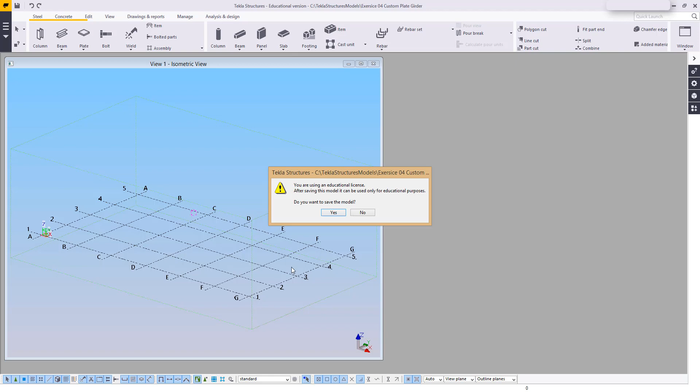If we head up to beams, we'll see there are already a couple of different options when doing something like a plate girder. For example, you can take a WI or a PHI. With WI, you put in your own amounts, sizes, and get it exactly the way you want it. You can also have it go large and smaller, have different sizes for front and back, and you can mostly do the same with the second one.

But we are not going to do any of this today. What we'll be doing is making our own.

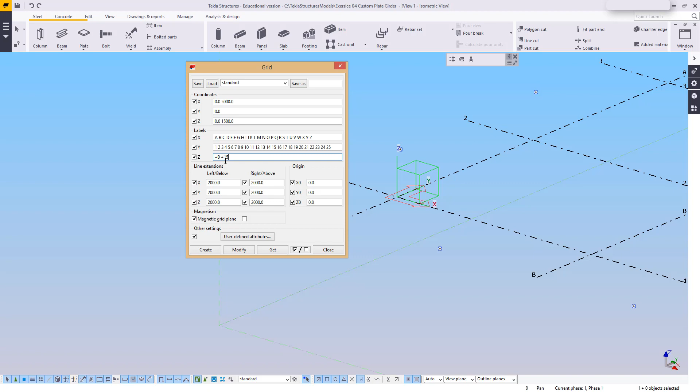Firstly, I'm going to open up my grid lines and set it down to be, let's see, make this 5 meters in length. Width, we don't need anything, and height we're simply going to have a bottom and a top, since we'll only be doing this one item. 1500 should do. Modify this and close.

Once that's done, I'm going to reduce my work area by fitting it. Here we go. Next thing, not really needed, but I'm going to change one to CL, since this is a center line. Then I'm going to right click, create long grid lines to get views on all my grids.

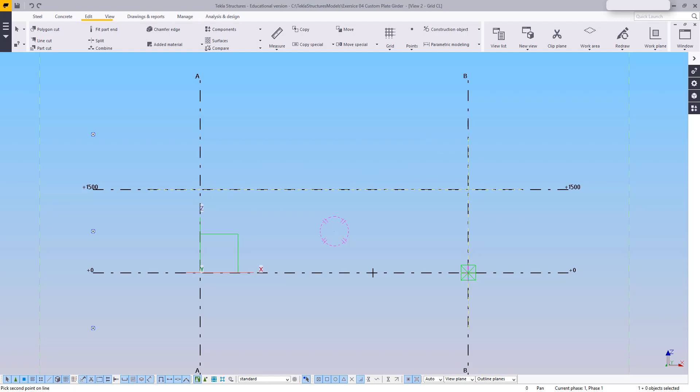Let's open up center line and work from here. Starting off, I would like to lay out everything using construction lines. I'll put one at the top, going down, bottom, and back up. This is just so I can lay out the rough positions of all the objects or items I'd like to put in. Firstly, I would like this beam to have multiple sizes.

It's going to start off at 1500 and end off at 1100. But I don't want a gradual change. I want most of it to be 1100 and only a small area 1500.

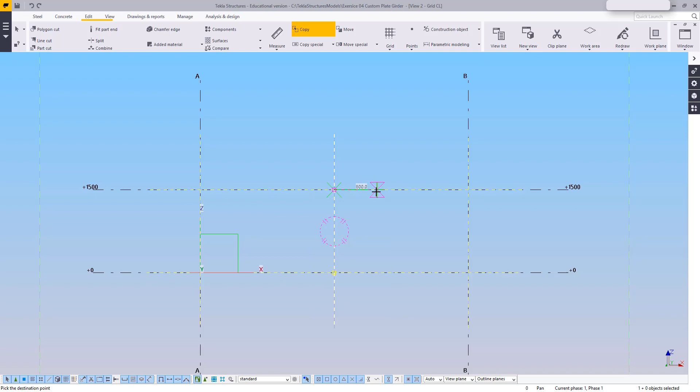So this might not make great sense, but I'm going to copy this 1500 to the side and copy it another 1000, and that's going to be my change point.

From here, I'm going to copy this bottom up by 400 and draw another construction line between these two points. That's going to give us the rough outline of what we'd like for our plate girder.

Now for the parts, I'm not going to use any of this. Firstly, I'm going to change this to plate. I can change the assembly mark to PG for plate girder and change the name to plate girder. Now for the section size, we are going to use a plate that is 40 thick and 600 wide.

I'm going to change the color to 1, and for now I'm not going to change anything else. Apply and put it in.

As we can see here, it's currently facing down, so we'll head on over to position and start changing our rotation. It's below my line, it's in the center, and it's facing down.

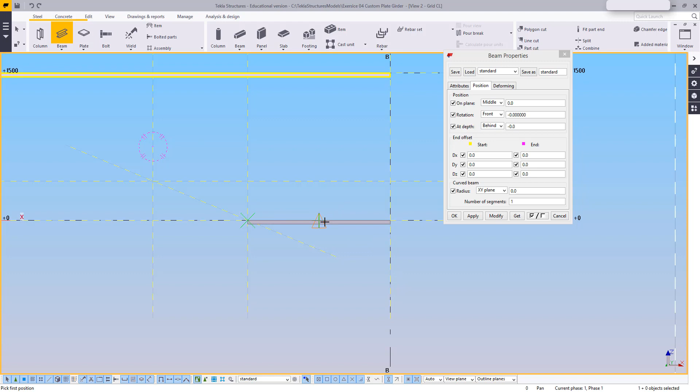So that is good. When it comes to these at the bottom, I don't want the part to be below, I would like it to be above, so I'm going to change it to front. Apply, get rid of the part, and just put it back in again, and we'll see it's nice on the front. From there we can put it in the rest of the way.

And this is going to be our flanges. Now I'll of course need to cut away these clashing areas, but we can do that at a later stage. For now I want to put in the web.

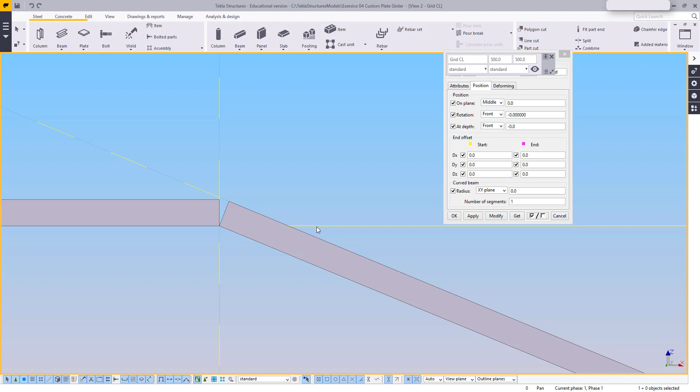So I'll take these two lines and either copy or move them up, so I can get a connection point between those two, or an intersection point more precisely. The reason for this is my web.

The web is just going to be a normal contour plate heading from corner to corner, to the beginning, and I can either click at the beginning or middle mouse button and it will finish off.

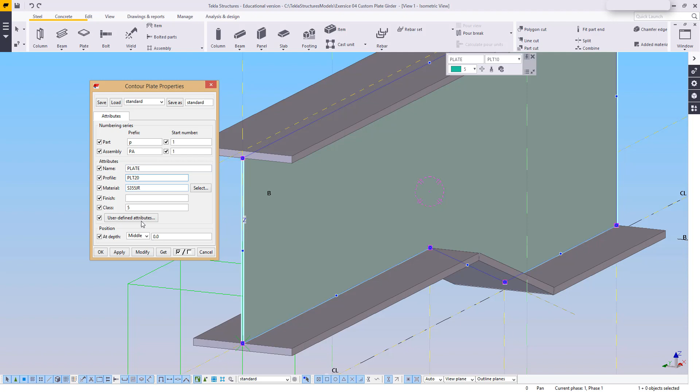As you can see, it's fairly thin, so we'll need to change this to something a little bit thicker, and we're going to use a 20 thick plate for our web. Color wise, I'd like it to be the same as the rest, so I'm going to change it to be the same as the rest.

Now for the next part, I would like to sort out this clash over there, as well as add some rat holes. For these rat holes, you can double click on any of our nodes, and we are going to select this one over here using 50, modify, and you'll see we got a nice cut out there for welding, and of course drainage for galvanizing.

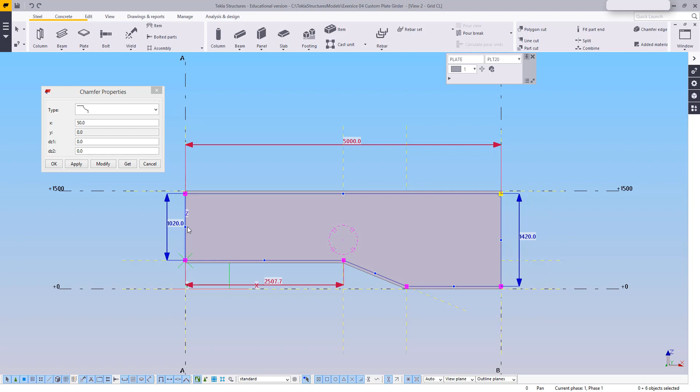Next I'm going to hold Alt and do an area selection around the entire item. This is going to select all my points, and I'm going to modify my chamfer properties so that all of them change into these rat holes. Close that up.

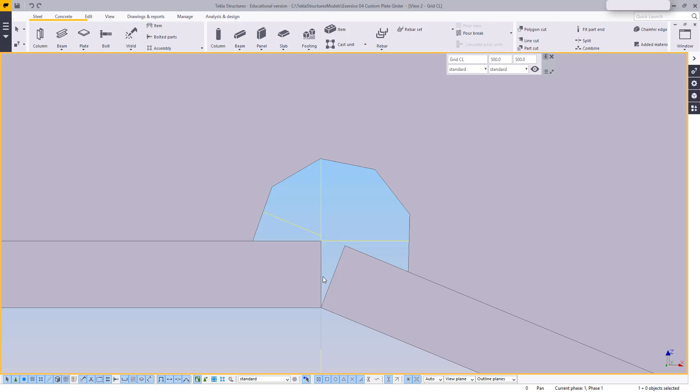Next, I would like to cut away the unnecessary material, and because this is a fairly thick plate girder, I would like to have quite a good amount of welding, and to that end I am going to cut away some of the plate to make space for the welding.

To do this, I'll put in a 20 circle so that when I use a line cut, I can use the 2 points of this circle to cut away that corner. I can either put in a new circle or just move this one over to another line cut from the 2 points and get rid of that side as well.

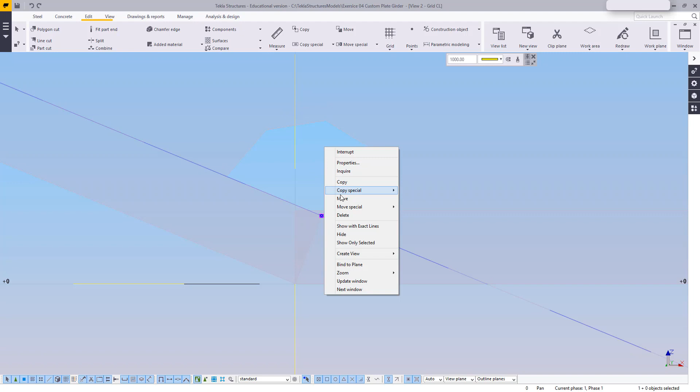Now for the one over here, I will need to do something a little bit different. So what I'm going to do now is Control 2 to get a nice transparent view. I'm going to move this line to the middle over there. This bottom line over here, I'm also going to move to the center of that item.

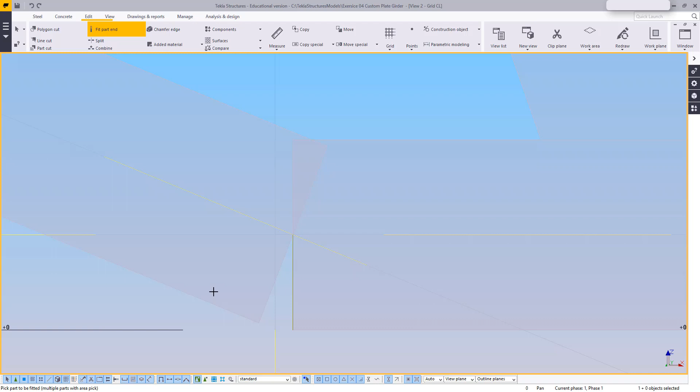And the reason for that is simply so that I can shorten the beam, but you don't necessarily have to shorten it. You could always use a fit part end and just cut it at that length. Basically, I don't want these two crossing each other. I want them to intersect in the middle. Now from here, I'll again be doing 2 circles, one for each side. Cut out the corners so that we could fill that up with welding.

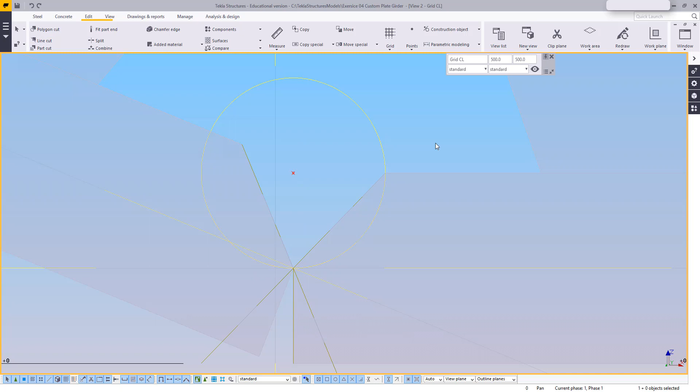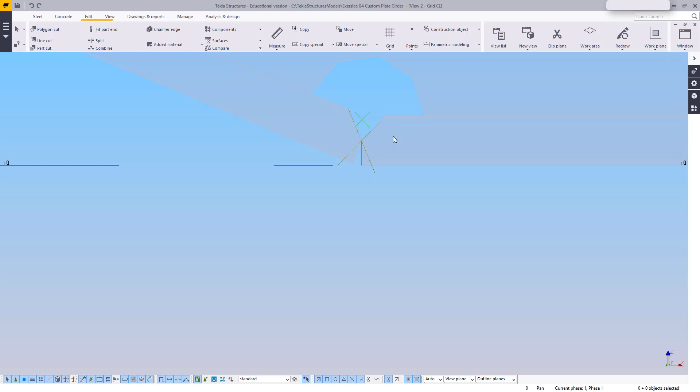Wonderful. Now sometimes it will happen that Tekla doesn't snap. Either just redo the snap or try and change it up and it might work. Otherwise, try a different method. Try copying a line 20 back or something along those lines.

After this is done, I'm now going to add a set of stiffener plates. I think, yes, stiffener plates should be next. So for these stiffener plates, we've got one of two options. We can either do it manually, or we could try and deceive the program a little bit. Now, I'm going to do one manually and another in a different method, just to show you both methods. Neither of them are incorrect, they're simply just preference.

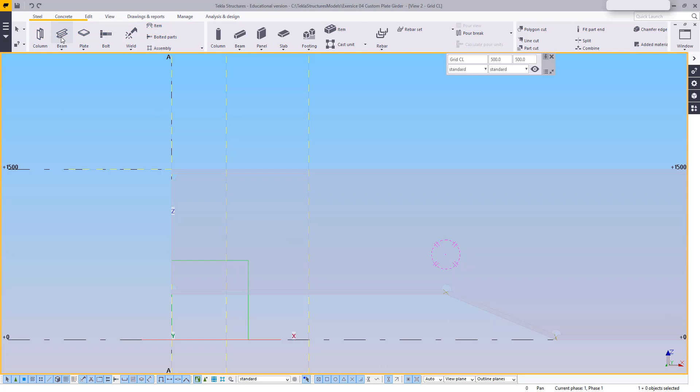So for the first method, I'm going to go to my selection, go to beam, and get my WI. So the height I would like as, let's say, we'll do the small side, so it's 1020. The web thickness is 20, the flange thickness is 40, and the width is 600.

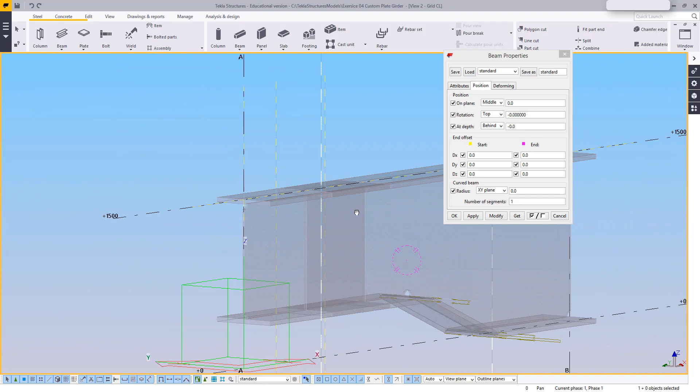Okay, and we would like our position behind, apply, and I'm just going to put it from anywhere over here to anywhere over there. Let's change this to top, and there we've got it. And as you can see, both on the side and from the front, it overlays my current beam perfectly. So that's good, that's what I want.

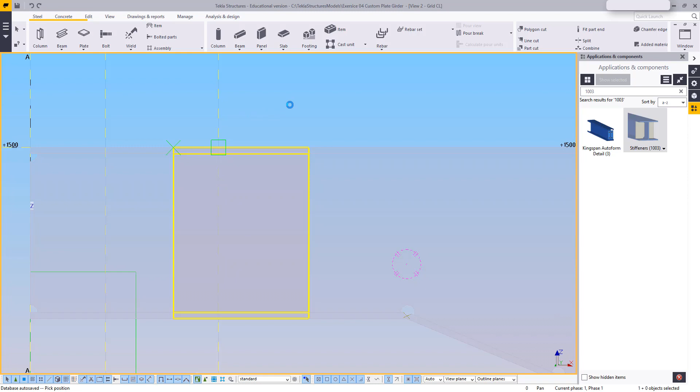Now for stiffeners on this one, I'm going to use the existing stiffener component, which is 1003. Over here, stiffener, I'm going to select my beam, I'm going to select my point, and it will put in this stiffener component according to that. Let's go to isometric and have a quick look at it.

Now what's nice about this is it's fairly easy to set it up exactly the way you want it. So we can say you want both of them to be 20 thick and 250 wide. And of course we can go to our parameters, say that we would like an arc and change that to 50, so we've got the exact same arc we've been using on the other side.

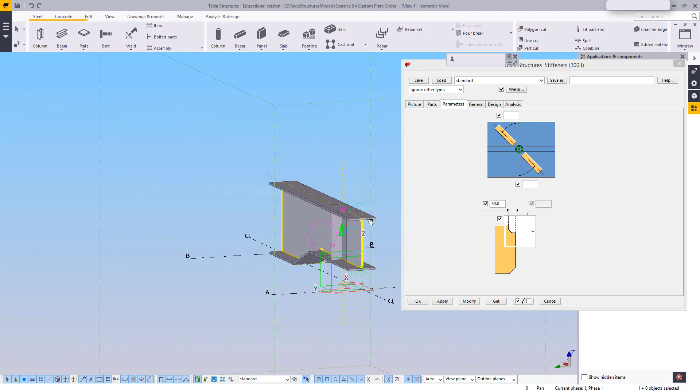Once this is done and you're happy with the stiffener, simply select the component, right click, and explode it. Now it's no longer a component but simply parts. After this we will select the new piece we put in and delete it, and it will leave our new stiffener behind.

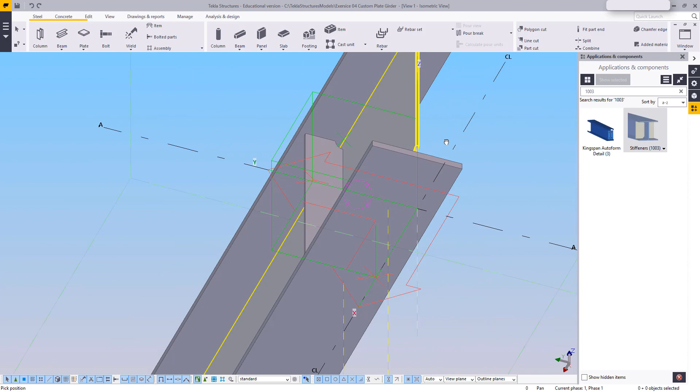The other method of doing this is the traditional method of creating a view, getting a section view, and then from that section view, let's just make this I think about 100 should do. I don't want to see the other one.

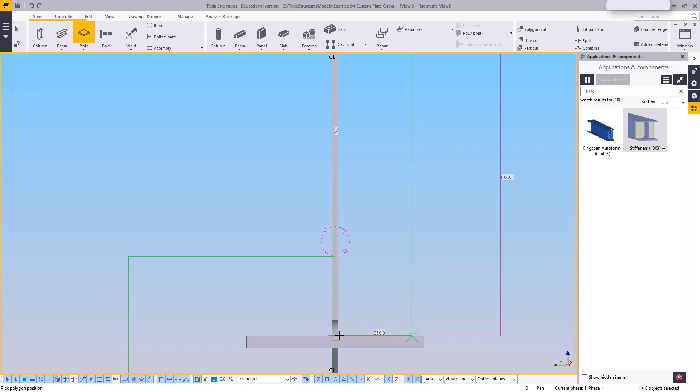Let's get this over to the other side by copy rotating. So copy special rotate, stick that over there and copy it over. Now the particular one you use does not matter at all. Do what is most comfortable for you. Sometimes you will have to do this manually by necessity. Other times you can simply get a component that'll get you somewhat there, and you can get the rest on your own.

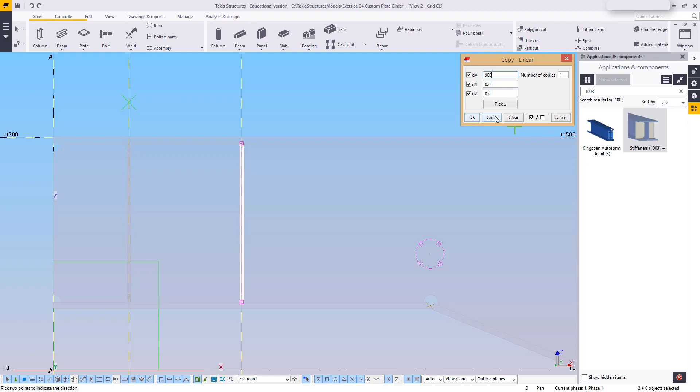After this, we are going to copy it linear in the X direction by another 900. Copy. Take this one, and we're going to copy it back by 1550. And just to ensure that I did not mess up my numbers at any point, I'm going to do the last 1300. Yes, it ends directly at the back, and I can now undo that. I don't need anything at the back. I simply did that to ensure that the numbers I was using for these have been correct.

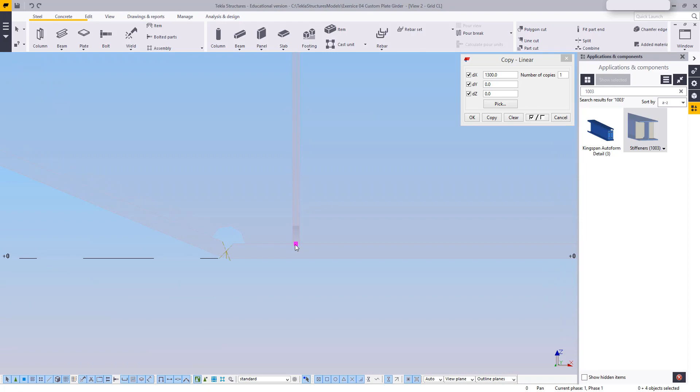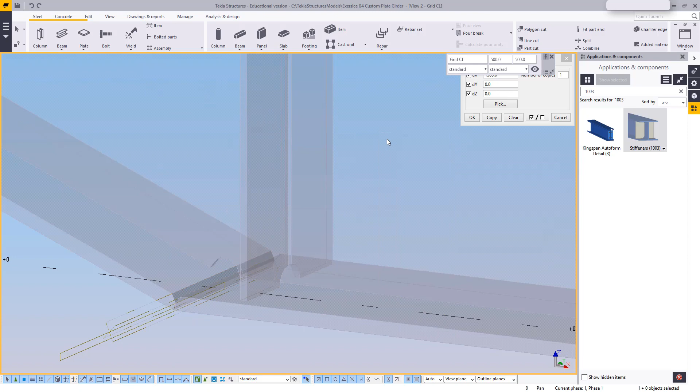If I did enter an incorrect number at some point, then my stiffeners would not have ended exactly at the end where they did. Okay. Now, select them, Alt select the nodes. Do Alt select, as if you only select it by click, you would only select the one node on one part. If you do Alt select, you select all four of them. Be aware that even though you see it in 2D, it is still a 3D structure.

Good. Now, once we've got this, we will need to do another item, and we're going to do a stiffener in between these two with a couple of holes in. And that's going to be 500 down. So, take the top line and either move or copy it 500 down. From here we'll go and get our view by 2 points. Just get 2 points on that line, and this will give us our top view.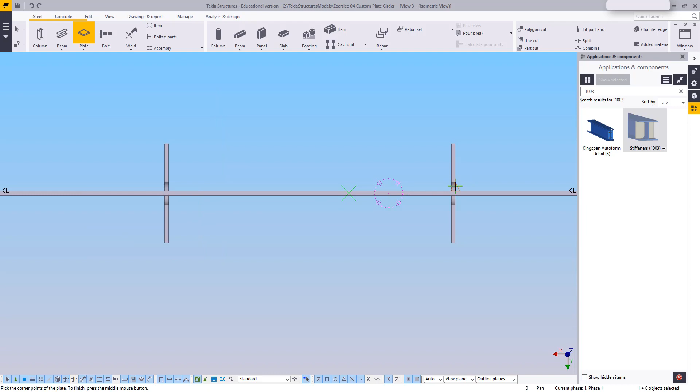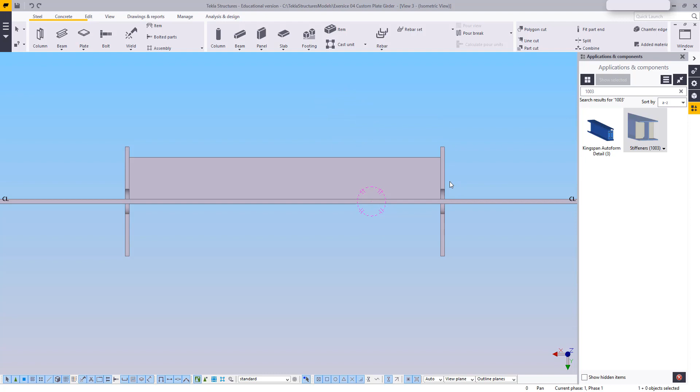Once we're done with that, we can go over to steel, open this up. Yes, that is 20. Let's confirm and put it in from corner to corner. And of course, we're going to go up by 200, so it's a little bit smaller than the stiffener, and get it perpendicular over to the other side. And for the last point, I like to just confirm with middle mouse button. I'm going to open that up again, get these two inside corners, and modify to get our rat holes in.

Now, for our holes that we would like to put in here, we're going to do diameter 22 holes, 465 from the inside over there. So I'm going to start off with bolts, select that one, confirm, and I'm going to use these 2 points to put it in. Firstly, I would like to get my bolt a little bit forward to its correct position, so I'm going to say 465,

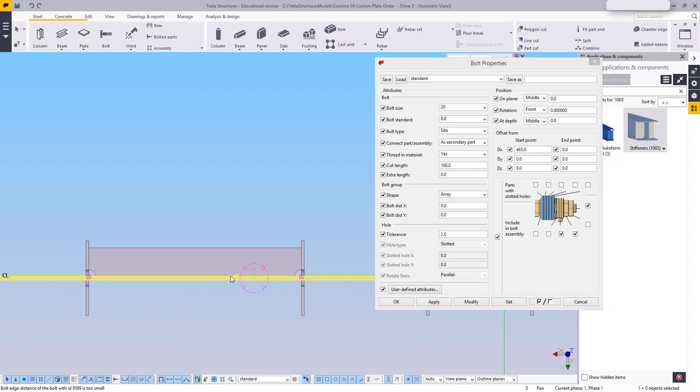modify. From here I would like to move it up, and I'm going to pick either depth or plane. I believe it should be on plane, and I'm going to move it 100 out. It's incorrect distance side, so I'm going to minus that, and there it's on the correct side. Then I'm going to take off the bolt to get it to be a hole only, and from here I'm going to say in the X direction I would like 300 and 300, 2 bolts.

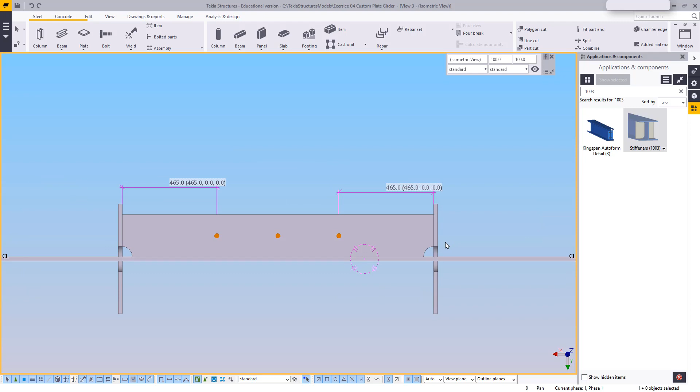And just to make sure that these are center, I'm going to select the last bolt and measure to the back, and this is just so that I can ensure it is the same as the front. Again, if you're doing something that should be in the middle of an item and you're working a dimension from the side, do measure both sides once you're done, just to ensure that you did not mess up somewhere.

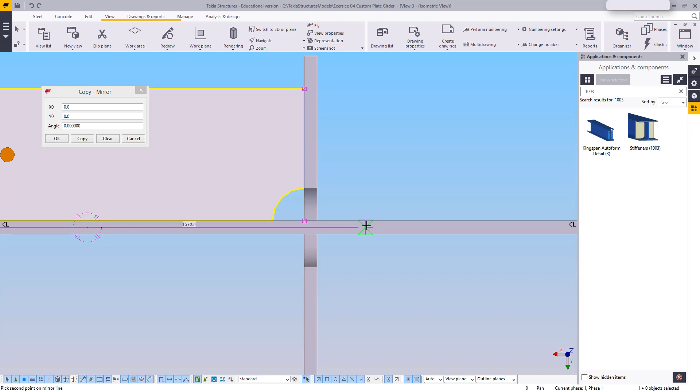And after that, we'll need to pick 2 points in the center. Usually you'll have this large snap. See, this bar larger than the other one to show that's the center, or you can go over to a see-through view, Control 2, or you can head on all the way over to the end where you can get a middle of or a grid for your snap. Let's copy this over, close that, and we can close this view, no longer require it.

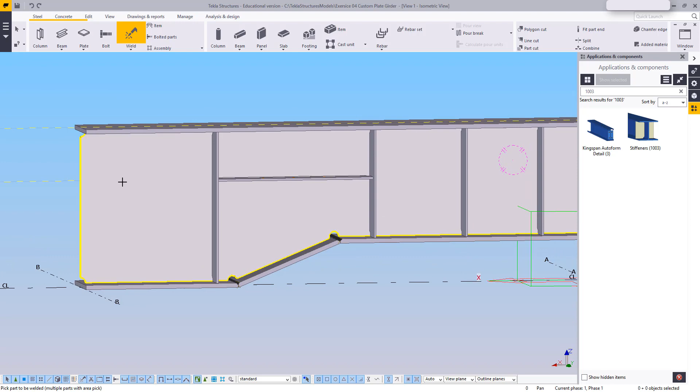Head on back to isometric, and for the next part, usually I would say always select the main part first and then weld the subparts to it, but as you can see our subparts are all over the place, so I'm going to select the web as my main part and just select everything to weld to it. Now I would still like to have this top as my main part, so I'm going to select it, right click, head on down to assembly and set it as the main part of the assembly.

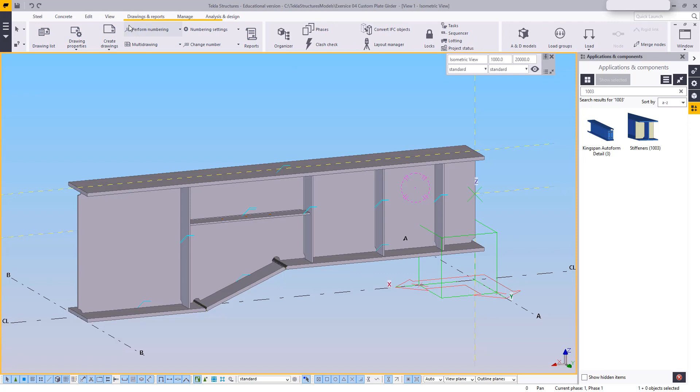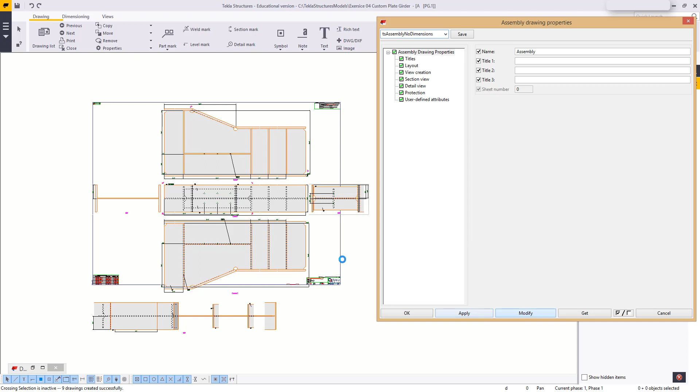I would like to open up my PG assembly drawing though. Close this and modify this. As you can see, not a drawing that can be used. For this, I'm going to open up and I am going to load a very specific one called assembly no dimensions. And the reason for this is I don't really like the way Tekla does it, so I would like to do it myself.

Tekla can of course be set up to do a lot of these drawings quite decently, but for this purpose and for most odd types of structures and assemblies, you will have to do a good portion of editing manually. I'm going to call this a plate girder. I'm going to head on over to my layout. I'd like this to be an A2 landscape. Scale, I'm thinking 7.5 should be good. If not, we could always just change that to whatever works.

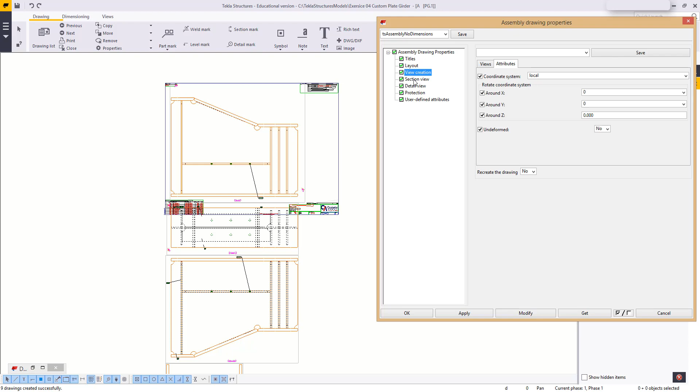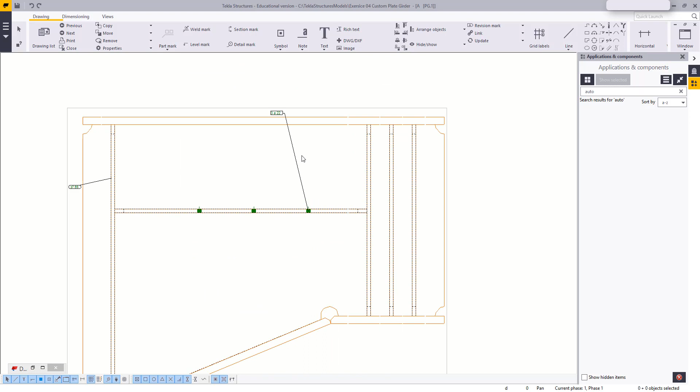I'd also like a couple other things. Firstly, let's go look at this view creation. Section view. I don't think anything here will really help. What I would like to do is just get rid of that. I'm gonna keep that one there, and I'm gonna get rid of all the other views. This view here is a good starting point. I'm just gonna get rid of that, and I'm gonna open this up.

Now, normally Tekla would give this as a bottom view because we are looking at the bottom of this specific plate. Remember, we put it on its side, so front is from there, this is from either the back or the bottom, the top or the bottom, and underneath is below.

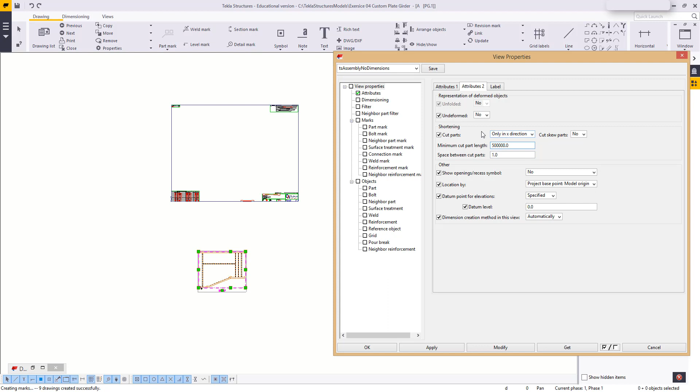Now, I would like this to be, let's look at a 10 size. That's close enough. Up until the point where we can quickly either shorten it a lot longer or just turn it off altogether. Now we can see if it fits in, and no, it does not. So let's up this to 15, and 15 appears to be quite a good size.

Again, this is a single part in a drawing, so the orientation of the part is not really going to matter, as I'll mostly be using section views and not really any specific views made from this part. So I'm going to change this to side elevation to tell me that this is from the side.

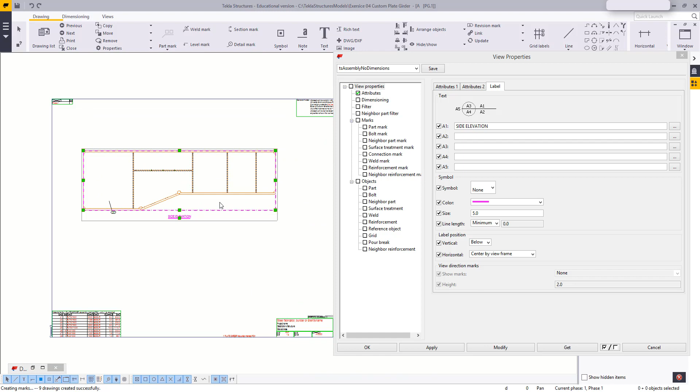The next thing I'd like to do is I'd like to get that colored in look back. So I'm going to head on over to part. I'm going to say fill. I'd like it to be solid with a special color. Modify, and this is going to give me a nice solid item. Next, I'm going to turn off that one and apply, as I'd like to keep the rest of the settings. Close that up.

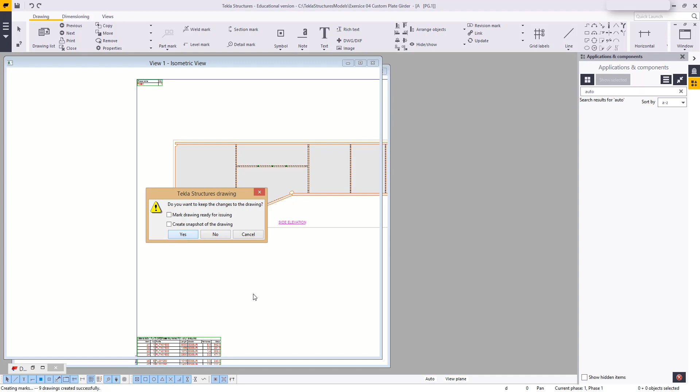Next, I want a 3D view, but I'd also like to change this information. So I'm going to close up this drawing just for a moment and go add the information I probably should have added to start. So we'll head on over to this drop down menu, go to project properties, edit, and we'd like to change our client name over there to CAID. We'd like to change our project number to CPG-001 custom plate girder. Our name of our project is going to be custom plate girder.

For a description of our structure, let's put our custom plate over there and change our name, project name, to something like Finas Heavy Industry. And we'll make our site, say, 42 Elm Street. Add your initials, and for the rest of the stuff, I don't think it really matters.

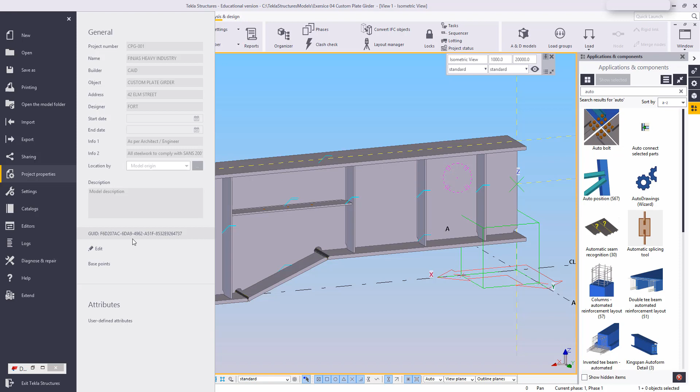Now you can use a custom set of information in a custom info block or a custom drawing block that I've got over here, but if you don't, it doesn't matter. Once you're done, say apply, so you don't lose the work and have to retype it. After that's done, I'm going to change my 3D view to, let's see if we load it, take off everything. I only really want those two changed, and I think this looks good. It's a nice 3D view of the item. We've got all the sides we want.

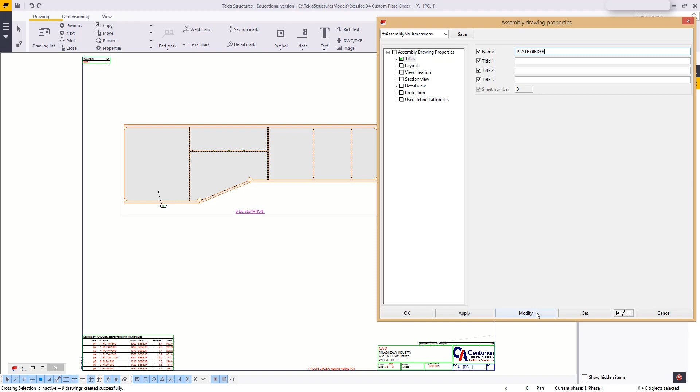So head on back to the list, open up the drawing, just change the title to Plate Girder, save this. Yes, it did take this time, and from here I'm going to go just to the isometric view. Now, as you can see at the top here, we are still inside the drawing properties. We are simply looking at our model from the properties.

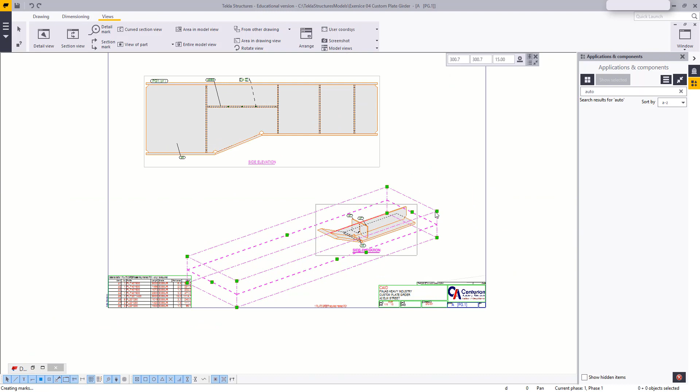And from here we are going to go over to views, and we're going to say we would like an area in the model, and we're going to select our area. This area will be the plate girder, and this will give us this ugly little thing over here, which we can make larger or smaller and play around with until we've got the entire item.

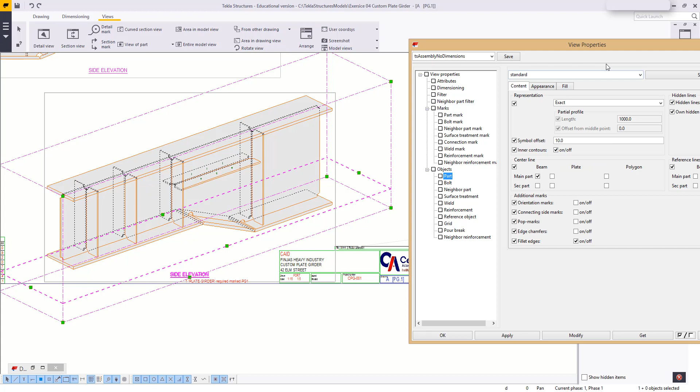Now I don't want any of these marks, and I don't think I want this thing to be see-through either, so I'm going to go into the part properties and I'm going to turn off the hidden lines. Here we go. I'm also going to go and take that side's holes, hide them, I don't want to see them either, and this is going to give us a nice view.

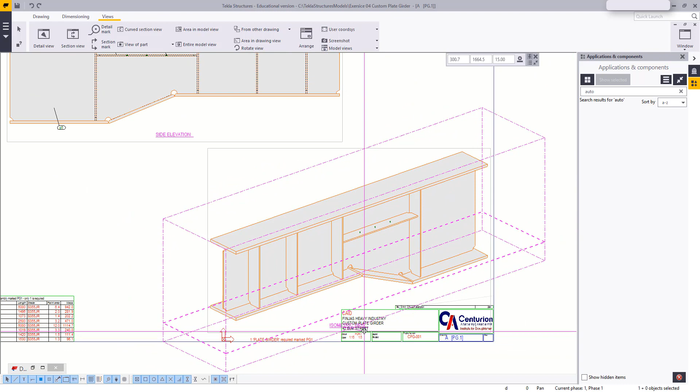Open this up, head on over to attributes, label. Now, we did apply the side elevation, so I'm going to change this to isometric view, or you could make it 3D view. That is completely up to your preference in what you want to call it. Next, I'm going to space it nicely here in the corner, out of the way. I'm also going to take the title and just move it out of my title block. And I want to make sure to leave enough space over here for my revision marks once I'm done.

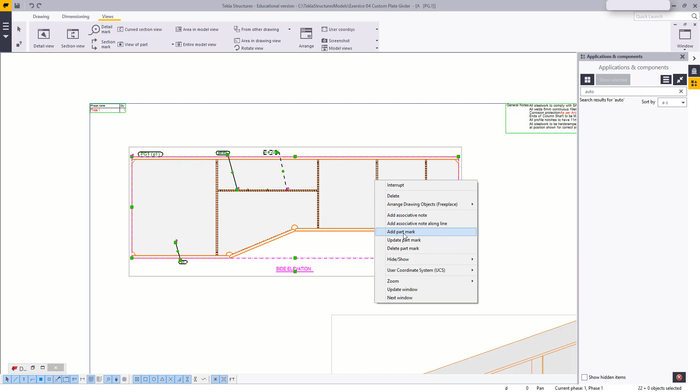This one over here can move a little bit up, and I'm going to add part marks to everything. That one's not needed as it's on the back, and I don't think this is needed either, but we can leave it in there. For now, it does not make much difference. For our web, I think I'm going to just change it to be somewhere inside and move it roughly over there, and that'll look fairly good.

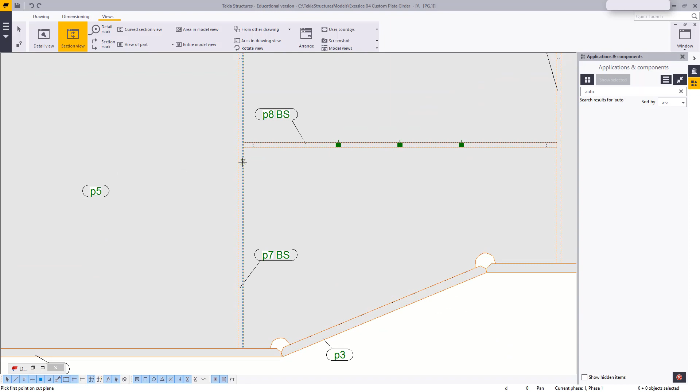Now from this I'm going to create a section view, and the section view will show me all these other parts that I don't necessarily see. Firstly, I'm going to make one of my large stiffeners over there, and as you can see, because it already had section views to begin with, even though it no longer has anything, it'll continue on with that mark.

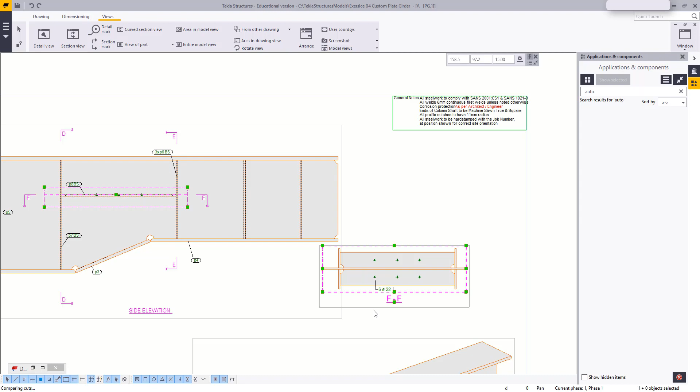Next, I am going to do the same for this one over here, to get the other side, and I'm going to make one section view of this piece, and I'm going to put it over here. The next thing I'm going to do is I'm just going to open up that and change this to A.

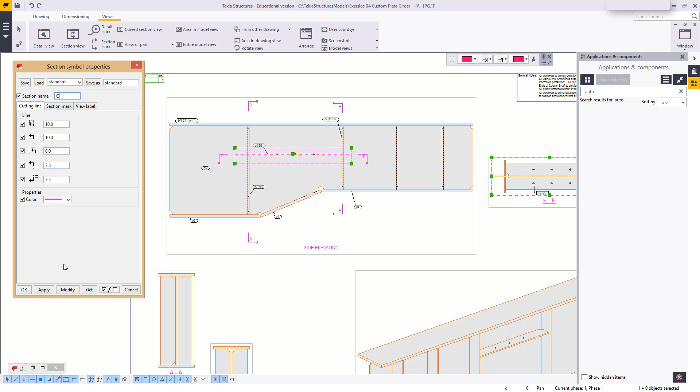Do note, once you change that, it'll change this one as well, so you're more than welcome to change around your section marks when Tekla doesn't use the correct one or the preferred one. You'll also find that sometimes, for some odd reason, Tekla will reset and start using A again, even though you do have an A, so it's good to change them as needed.

It can be over there. This one I'm going to move over there. This one over here. Now I would like these two heights to be the same at the top, so I'm going to right click and tell it to align. Let's say horizontally, I want the horizontal to be the same.

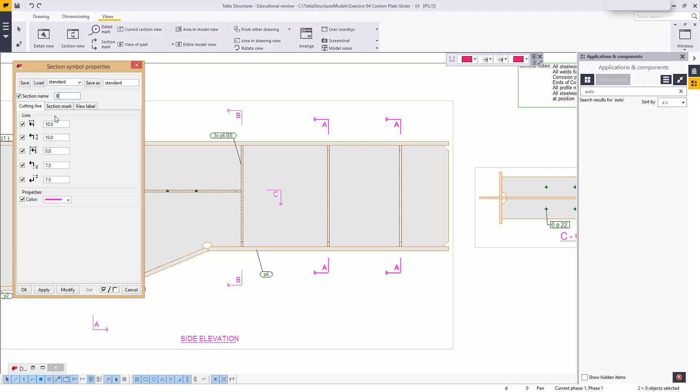The next thing I'm going to do is I'm going to go up to section mark. Using section mark, I'm just going to put in 2 more section marks, and this is just the mark and not the view as well. Once I've done that, I'm going to go to both of them and change them both to B. And this will show that all three of these are B, which basically means they're the same, and since all of them have the same part, I know they are the same.

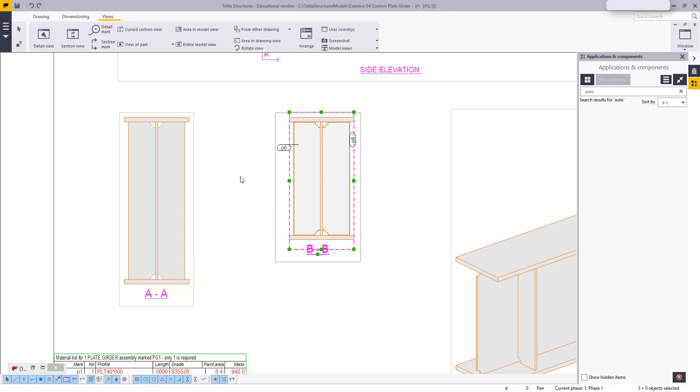Once here, I'm going to take my stiffeners and just mark them, and the same with this side, mark them, and this one here, just mark them. Now, I like the way these two are right up against it, and this one, it kind of can decide, does it want against or does it want there. So I'm going to open up all of them. I'm going to go to General after selecting and say I'd like them to be fairly inside, and they'll put them inside.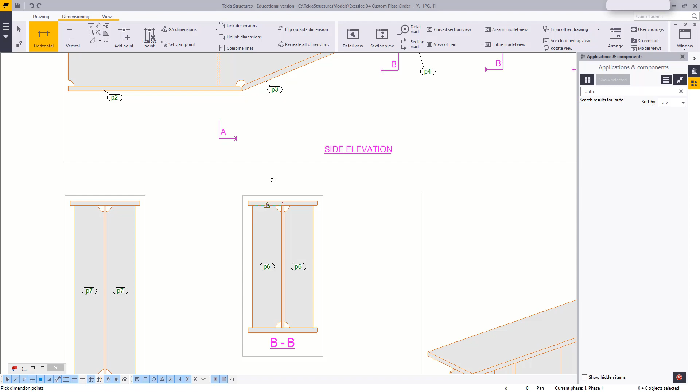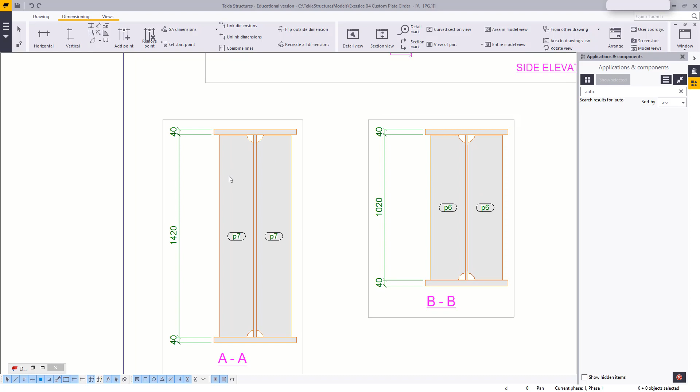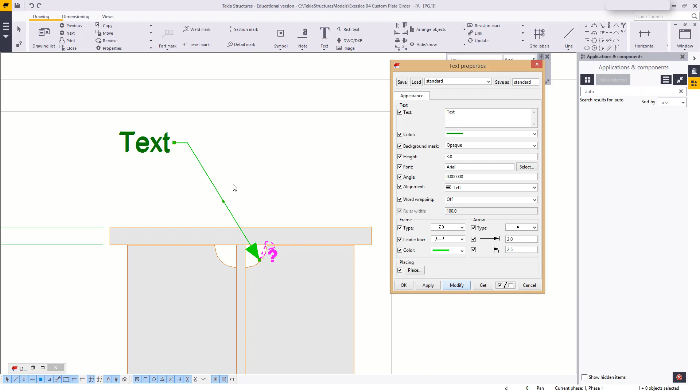To that end, I'm going to go to, let's say, drawings. I'm going to find a text note with the leader, and I'm going to pick any one of these, and this will give me a nice little text note. Opening that up, I would like the color to be green on my frame, and that'll make my arrow visible. I'm also going to give this a little arrow, just a small one, nothing too wide. Let's make this 1 millimeter, something like that, with a R50 and TYP in brackets.

And this will just tell them that all of these are a typical of 50. Great way to just do one note and not have to worry about any of the rest. Next, let's just move this a little bit more to the side so that I've got some space to do some more dimensions. Dimension-wise, firstly, I would like an overall dimension.

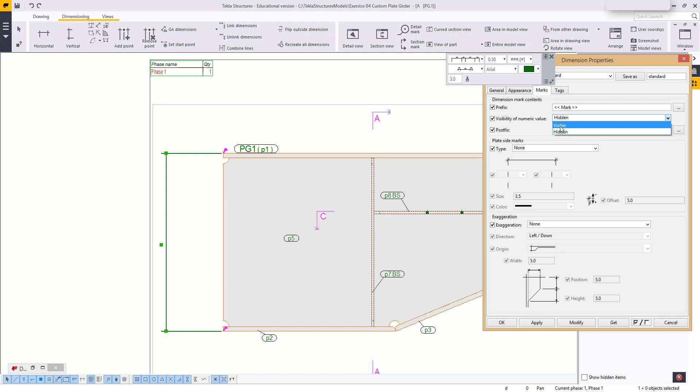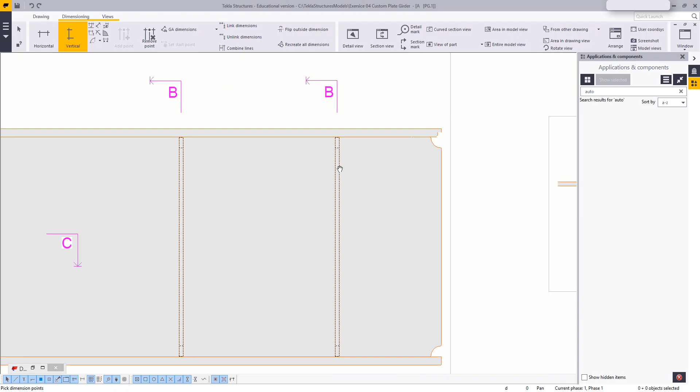Now, as you can see, mine disappeared, and that's because Tekla put it automatically on hidden. For some odd reason. I'm just going to change this to visible and apply the setting, and at least for this instance it shouldn't bother anymore. Later we will do a more permanent change, but for now this is good enough. And that one over there. Now, I don't need to have the bottom, but I think I will add it in anyway.

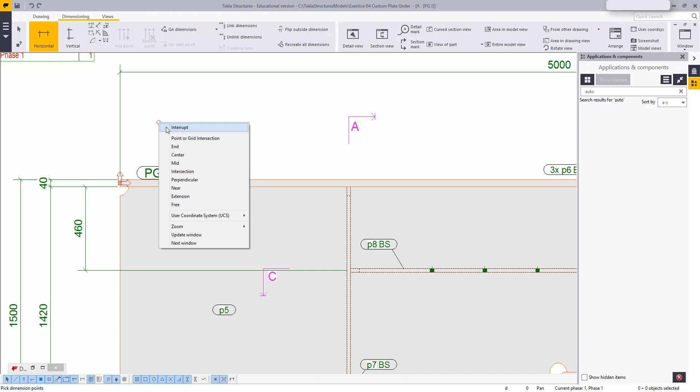And of course I will need at some point just to add a dimension that shows what's going on with this one over here. The reason I have it from the bottom of the flange instead of from the top at 500 is because it's underneath this dimension and I don't want it to interfere with this dimension. It looks just a bit neater this way. Next we would like the overall up top. Then we want one that goes between all of these stiffener plates.

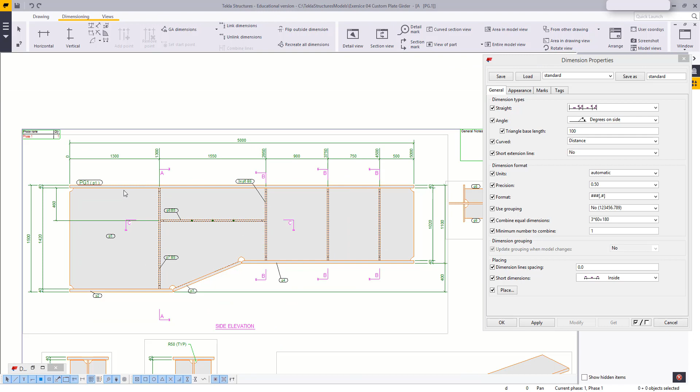Now for this one that goes between the stiffener plates, I would like them to be a running dimension. So I'm going to open up and head on over here and change it to this third option that's showing both dimensions there and at the ends. This will give me a running dimension, and that makes it a little bit easier for some of the workshops to get all the correct points on which to weld, since they can only really do one measurement straight through and just tick off at the correct distances instead of working out.

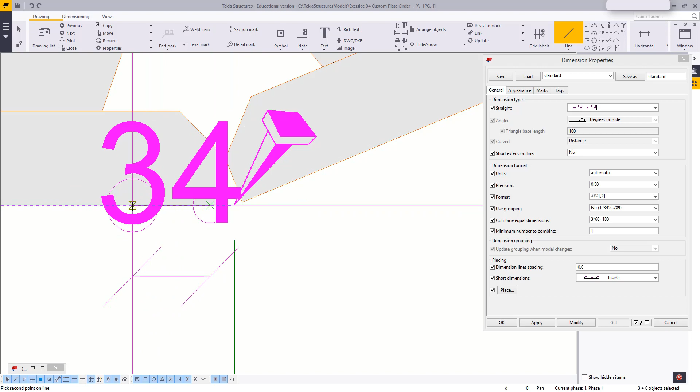Next, I would like that over there, and over there. As you can see, I've got it 1,500, 1,000, and I put it right over here in the air. Now, because I fit part end instead of moving it back, it does provide a snap right up in the air. If it did not, and you want a snap over there somewhere, I would suggest drawing a line either side. Take that line and just move it down.

Just move it across, and once this is done, for the sake of neatness, I'll just move it back and do the same with this one. Just move it back a bit. And without really doing much to my visuals, it gives me a new point to snap to.

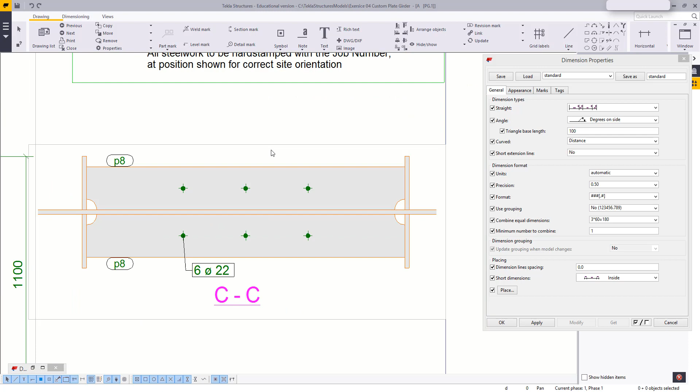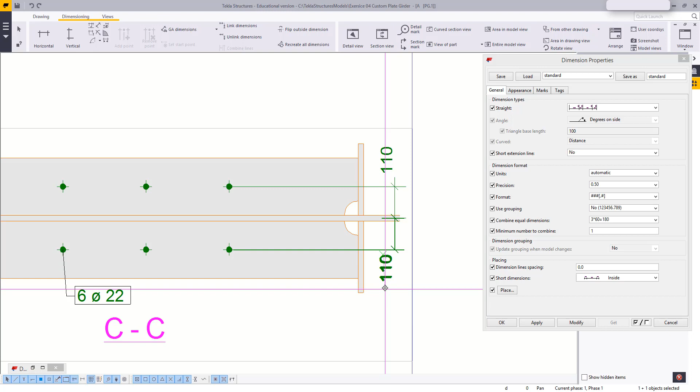Now, for this one over here, I would like to give the position of my holes. So I'm just going to do a cross center with that over there. And as you can see, they decided to put it like that. So I'm just going to bring both of these out. For a nice look like that. Besides those ones, I want from the inside a measurement to each and every hole, back to the inside over here.

And I don't want this to be 2 at 300 equals 600. I would like actual 2 dimensions. So I'm going to double click. I'm going to go to grouping and just tell it combined dimensions, no, so that I've got single dimensions. It looks a lot nicer. Grouping is good for something like a stair where you've got boards of dimensions, but for this, I feel this is a lot neater.

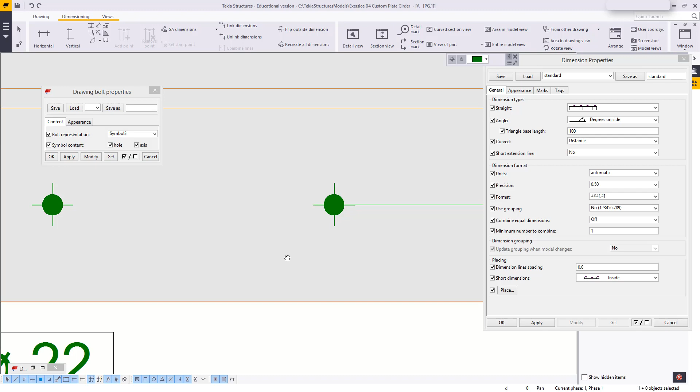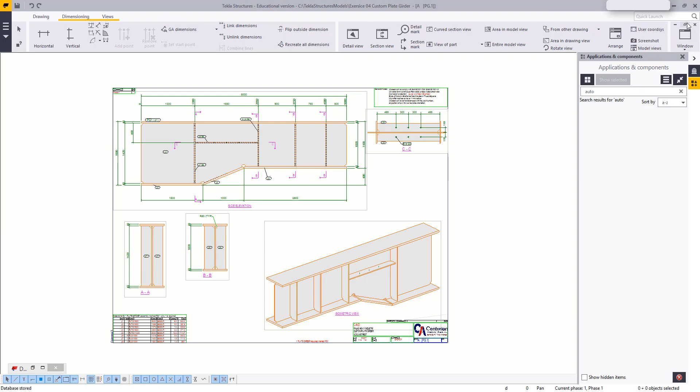Next, now this is colored in, and this is also colored in, but a much darker shade. So it still stands out, but the dark on the dark doesn't stand out that much. So instead of having a solid, I'm going to change this to another symbol, number 2, and that just gives me the cross with a circle, and that'll be much easier to see. Once that's done, I believe that should be everything. We can save that, head on back to our drawings.

I'm going to issue this drawing to get the issue mark, as well as add a revision mark. This is going to be the first revision, so 01, created by me, created today's date, and I don't think anything else there is necessary. Description, issued for approval, and I'm going to save this as 01.

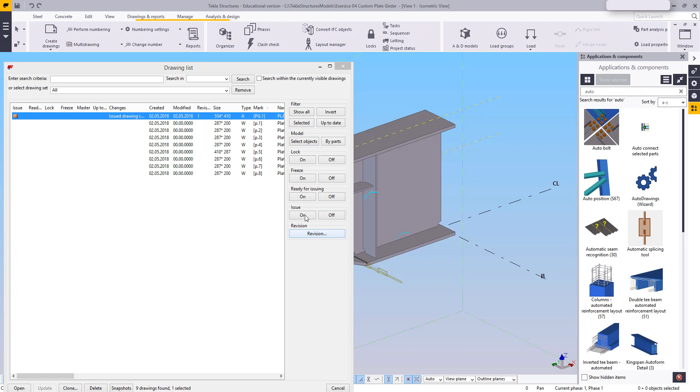Make sure you save all your issues, especially if you have to redo drawings or add drawings later and you've got a couple of these to add. It's a lot easier just to load them up than to rewrite them out every time. Now, if we open this up again, we'll see it was revised and issued for approval. And of course, the useful feature of the issue is if we save, it'll tell me my issued drawings changed, and I'll keep that there. Okay, and that's it.